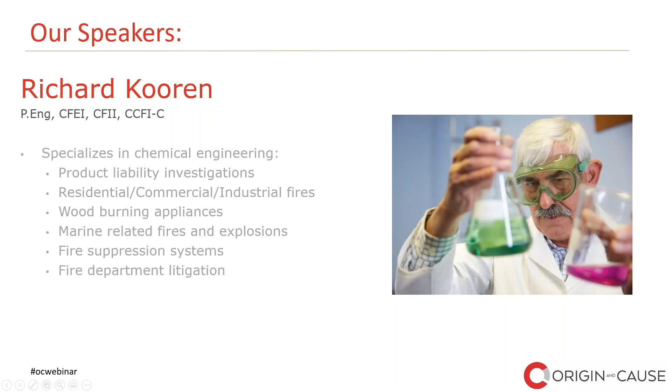Welcome, everyone. So, in any forensic investigation, you must first zero in on the origin of the incident. And within the place of origin, you will find the cause. A lot of people use the term origin and cause and cause and origin interchangeably. But to be correct, and I'm going to correct that today because it's technically incorrect, you determine the origin and then the cause of the fire.

In this webinar, we'll go through the investigative process of a forensic engineer specific to marine fires and explosions. And it'll become clear as to why there's no such thing as finding the cause and then the origin. It's origin, then cause. So first, finding the origin. How do you determine where the fire originated? Even in a structural fire, no different. You work from the least damage to the greatest damage.

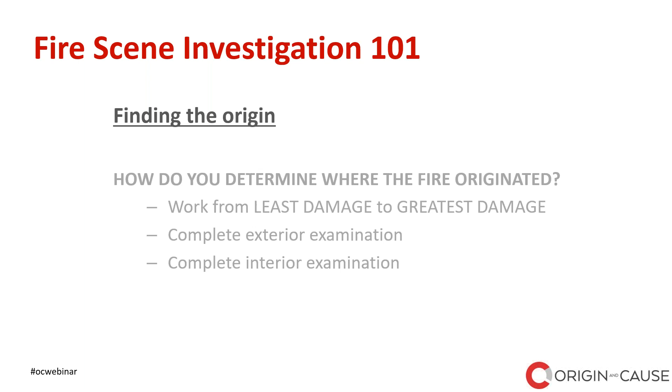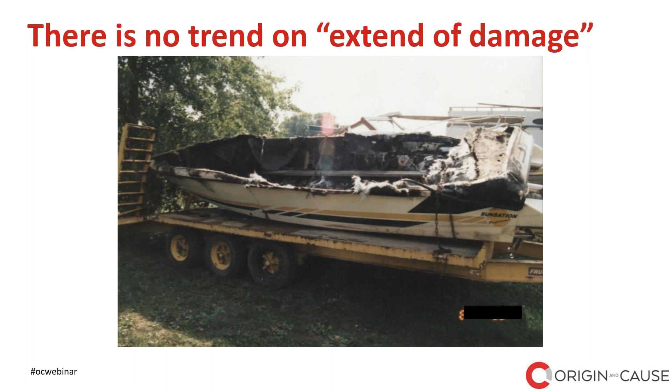And there's an example of a total loss. That's all that was left of the boat. So, information to consider in all marine fire investigations. One, time and place of the boat fire. Is the boat at a marina or is the boat in an isolated area? Time of day: is it in the middle of the night or middle of the day? Beginning or end of boating season? These are questions to think about when you're getting a loss.

Physical evidence, what we'll be looking at in the photographs as we go through this. We're looking at char patterns. Now, most boats are not wood anymore, but you still get them, and there's still wood on boats. So we're looking at char patterns, no different from a house or a building fire. Fiberglass delamination: with fiberglass, it's the epoxy resin that burns, not the fiberglass mat. So we're looking at how many layers of fiberglass have delaminated. It gives you an indication of how long the fire has burned.

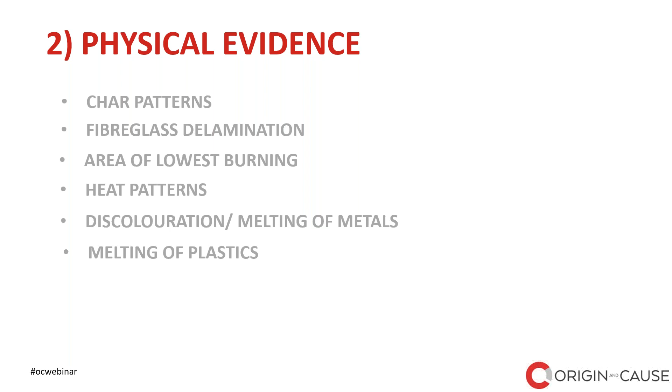Again, no different from a structural fire, the area of lowest burning. We're looking at heat patterns, again no different from a structure fire. We're looking at discoloration and melting of metals and melting of plastics. These are all indicators of proximity to the fire and direction of fire.

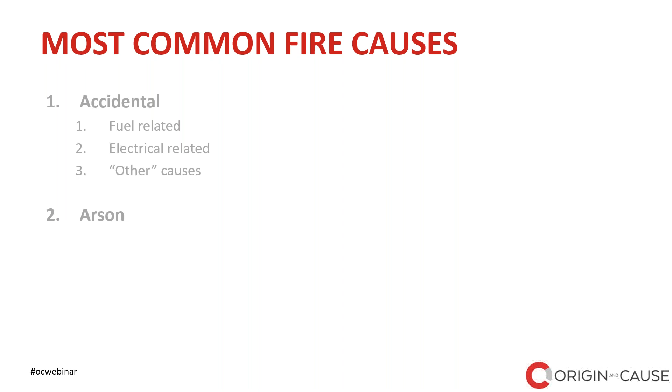Most common causes of fires. Here's the basic two categories. We have accidental, and under accidental, we have fuel related. Number two is electrical related, or three is other causes. And of course, then non-accidental: arson.

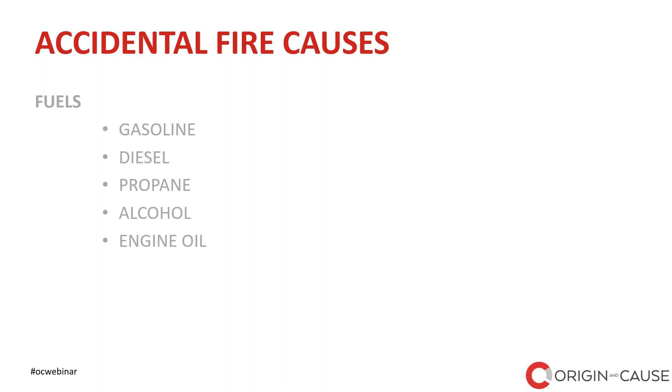Under accidental causes, fuels, you can have a varying degree. Most boats are gasoline, but some boats do have diesel engines. And on a lot of bigger boats now, it is not uncommon to find propane. This is not fueling the engine, but this is for the toys: the propane barbecues that are sitting on the boat or hanging from the aft rail. Older boats used to have alcohol cooking stoves. That's more or less gone by the wayside, but some of the older boats still have them. And then you can have an engine oil fire.

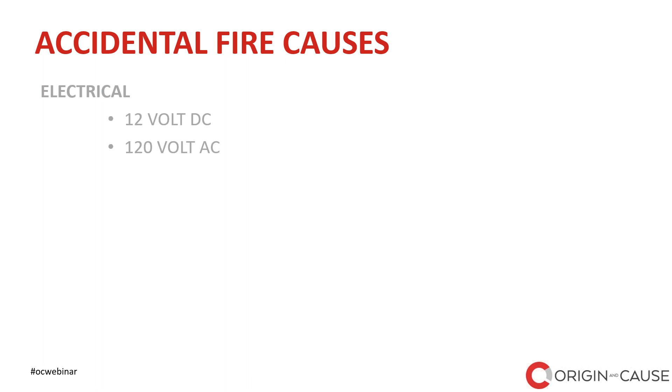Under electrical, you typically have one of two electrical sources. You have 12-volt DC, which is the onboard electrical batteries. And as most boats have shore power, you have 120-volt AC, but you can also have a generator on board the boat, which will produce the 120-volt current as well.

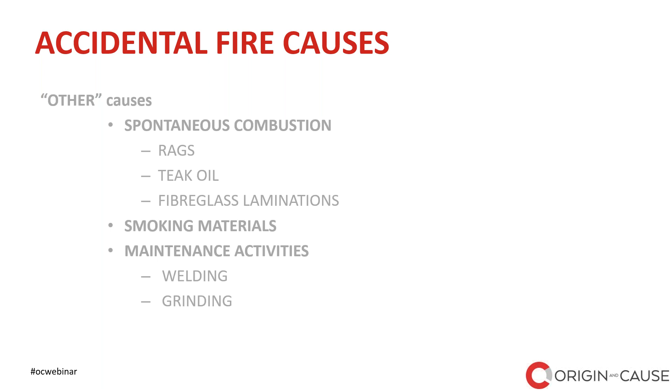Under other causes, you can have spontaneous combustion of rags soaked with teak oil, fiberglass laminations. It's a chemical process. It generates heat, and if not done properly, can cause a fire. Obviously, you could still have smoking materials. And on boats, there are some other maintenance activities such as welding, grinding, or even working on the engines for various reasons.

So here's our first accidental cause. This is an electrical fire. This is a 30-foot express sailboat. In a nutshell, the owner of this boat lived on the boat, worked in downtown Toronto, departed the boat first thing in the morning, and sometime later was notified that his boat had caught fire. Now, as you can see from that photograph, there is not a lot of damage to the exterior of this boat. It pretty well self-extinguished, fortunately.

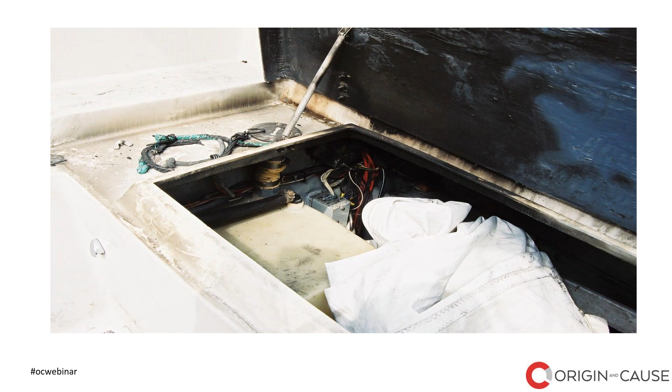But if we look at the hatch into the cabin, you can see there's some heat deformation, there's smoke damage, all in the area of the hatch cover. No evidence of fire on the aft deck area. It's pretty clean. Now we're looking at, on the aft deck area, what's commonly called a sail locker. And you can see on the underside of the hatch cover, there is quite a bit of smoke. So there's an indication that the fire has migrated into this area at least.

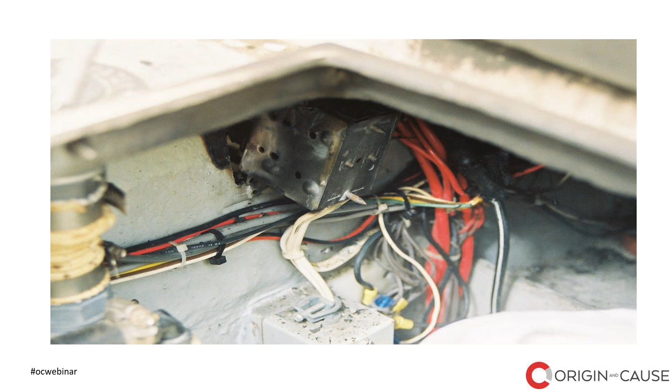Now we look a little closer into the hatch area, and you can see that metal box here in the middle of the screen, and that's a junction box. Now, we're going to raise this point a little further later, but is that appropriate for a boat? And we will see why.

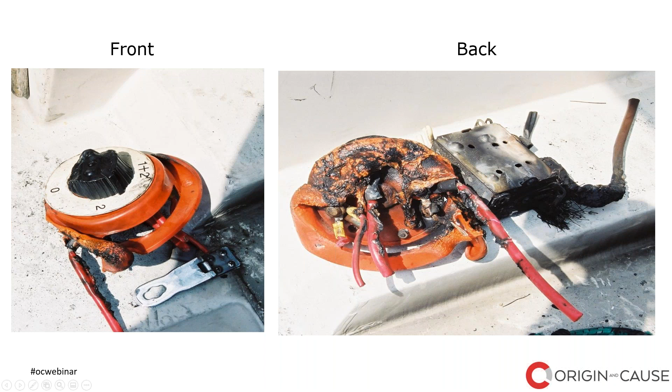Now you can see this battery switch has sustained some fire damage, but the greater damage is to the right of it. Now we're looking at the battery switch here in this photograph. That's the top of it, and you can again see there's major exposure fire damage to it. There's the back side. Again, exposure fire damage, no evidence of any internal failure. And there's our junction box. Now, what is that junction box being used for? Well, closer look, and we see it is a receptacle box.

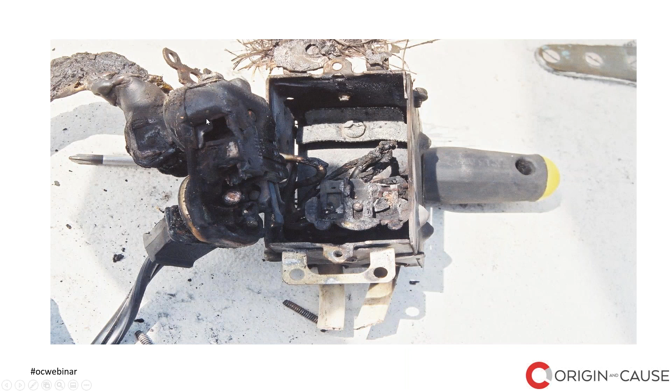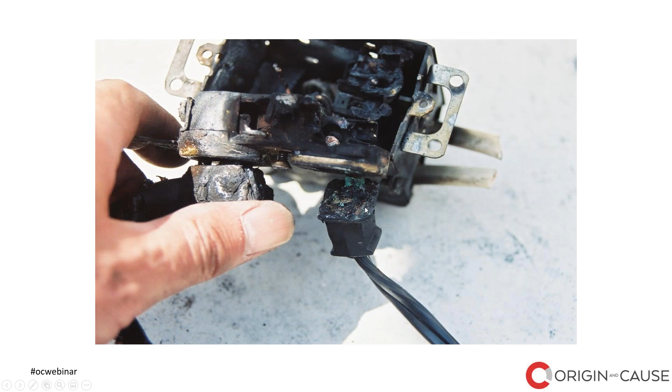Now we've opened it up, and you can see the upper half is not badly fire damaged. The lower half, the Bakelite material, has disintegrated, and you can see a nice big glob of copper there and a glob of copper down here. You can see this is the center of the electrical activity in this case. Now, when we look a little closer at this plug, the bottom plug, you can see that one of the prongs is actually melted right off. The other half is still there. But notice the green oxide on it.

Now, again, because this junction box is designed for a house, not a boat, it's not watertight, it's not moisture resistant, and boats, being boats, are not 100% watertight on the exterior. So moisture has infiltrated into this receptacle box over time, built up corrosion, and that corrosion has now become conductive, and we've had an electrical failure resulting in this fire.

So take home points from this little example. Boat owners commonly make their own modifications to their boats. They don't like having people sometimes do the work for them when they can do it themselves. It's cheap. They don't always use the proper materials. As an adjuster, it's crucial to preserve the evidence at the scene.

And as an adjuster, you need to ask these questions. Has the owner had any repairs or modifications done to the boat lately? And if so, who did the work? And regardless of who did the work, obtain detailed statements to protect yourself from liability. Now, with any lawyers present in this webinar, you need to make sure some of these points are covered off too, if we're going to litigation.

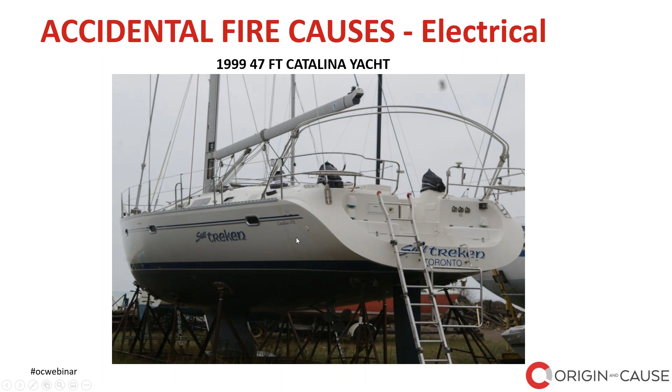So now we're looking at a second example of an electrical fire. This is, again, not an extreme. You can see this boat, a very, very large 47-foot Catalina yacht. It's an older one, 1999. This boat had actually sailed across the Atlantic. It's that capable. History on this boat, the gentleman had it winterized. It was onshore. Now, in the next photograph, you can see the boat looking out toward the lake.

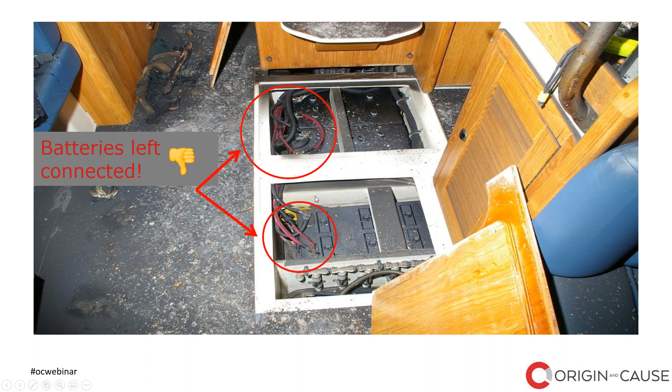So this boat had live 12-volt power all the time, even when it's on dry land in the middle of the winter. Why is a good question. So is it a good idea? There's no need. You're not running bilge pumps because it's keeping the bilge empty of water. There's absolutely no need for this boat to have electrical power.

Now, again, going back to an exterior shot of the boat, notice the mast is in place. Is this a great idea? This mast may not have been one that could easily be taken down in the wintertime. It sat on top of the roof cabin. It didn't go all the way down. So yes, it could, but it's a big mast.

But think about it, wintertime, strong winds, what is that mast going to do when subjected to extensive high winds? It's going to shake. And that vibration is going to be transferred through the boat. And those wires are going to be shaken around. If the boat has sailed across the Atlantic, it's also going to have been banged around. So the wires are actually rubbing together and have been rubbing together for quite some time. And finally, they shorted out and we had a fire.

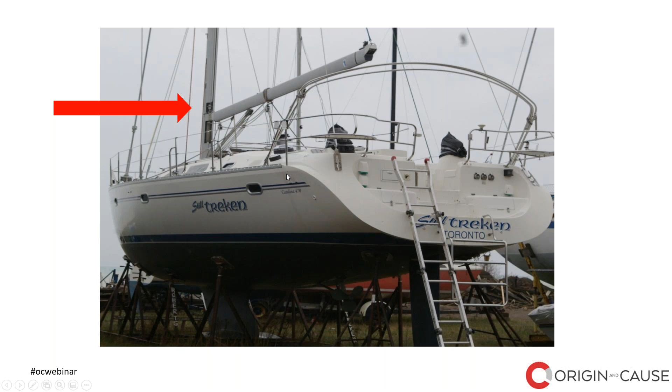So again, when boats are placed in winter storage, all electrical sources should be disconnected. There's no need to have an electrical source or live electrical on the boat. So questions you need to ask when you receive a fire for a boat in storage: Was the boat winterized? If so, who did the work? Many boat owners will winterize the boat themselves, because it costs money to have somebody do it.

And again, if they did do the work themselves, have them explain what they did for the winterizing. Were the batteries disconnected? And in this case, could the mast have been taken down? It's something that may have been practical, it may not have been practical.

Okay, moving on. We have another accidental cause, and this time it's a fuel explosion. It's a 1986 25-foot Doral Citation. A very brief background. The current owners had purchased this boat quite recently. No problems with it that they knew of. They were refueling the boat, and after refueling, they went to start the engines. Now, whether they ran the bilge fans long enough to evacuate any gasoline vapors, which they're supposed to, it's not known. And anyway, the boat had an explosion.

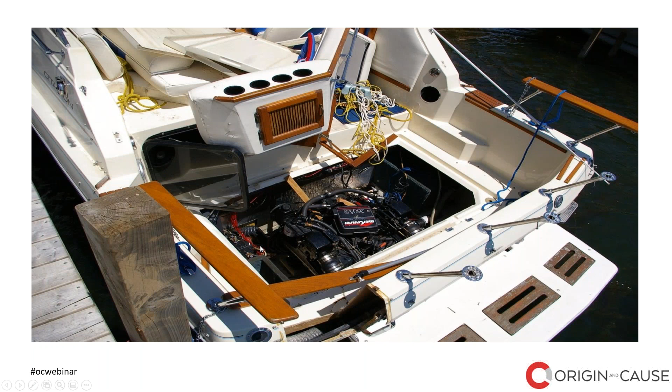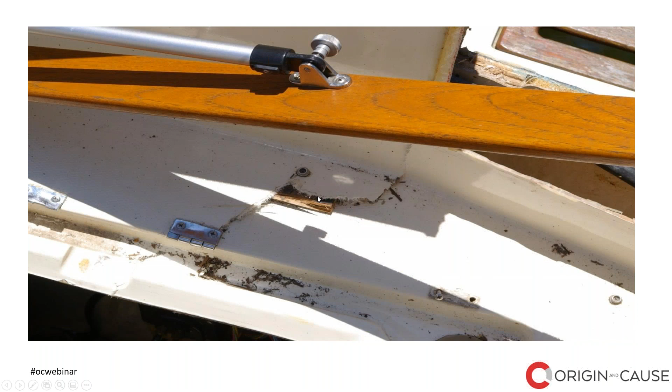So now we're looking at the aft, or the stern of the boat. There's the engine compartment, and you can see there's no evidence of damage below, but look at all the other items. Look at the railings that have been broken off and separated. This little console here has been displaced, because obviously it would not normally be sitting blocking the porthole window. So again, giving an indication of the push that took place. And again, we've seen the railing, it is actually lifted upwards and it's cracked and torn the deck.

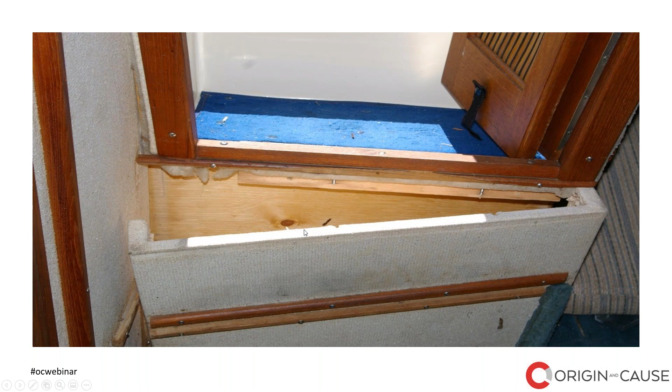This is looking inside the cabin, and you can see that the explosion has actually blown into the cabin and displaced the steps. And you can see a lot of displacement, delamination of plastic due to the flexing of the hull. Again, looking at the engine compartment, there is a bit of heat damage here, and you'll see there is a bilge fan duct there that's spiral wire covered in plastic, and it is melted off. But no obvious sign of fire within this area. But the ignition source did occur down here.

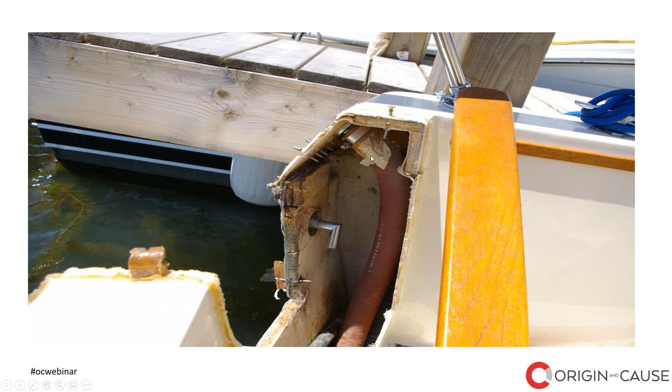So again, looking at this area here, this was actually a little door that allowed you to step into the aft deck area from the swim platform. So we're going to look closer at it. Now, again, this would normally be all concealed. So the red line here is your fuel line. That's where you're filling the fuel tank up at the pump. And you notice there's masking tape around the hose. And a closer look, you'll see there's a clamp on the fitting. So that fuel line is firmly secured. Why this masking tape was there, we think it was used as a seal, but the current owners didn't do this.

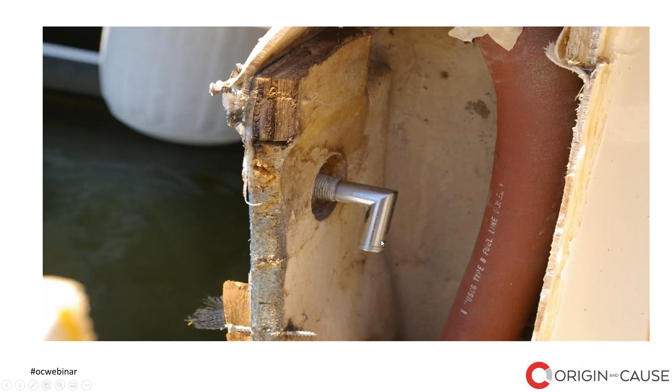Now, we're looking below that area, and again, there's your fuel line. This fitting here is the vent line for the fuel tank. So when you're filling up your fuel tank, gasoline vapors and air are being pushed out of the fuel tank. They're being displaced. They've got to go somewhere. So rather than let them go into the engine compartment, there is a line that directs those vapors and purges it on the exterior of the boat. But the question here is, where is the line?

Well, there it is. A black rubber hose, no hose clamp, and masking tape holding it in place. So in this instance, what we've had is that the clamp or the vent line has come off at some time. And of course, when the boat is now being refueled, those vapors, instead of being vented to the exterior of the boat, are accumulating or venting right into the engine compartment. So again, lesson to be learned.

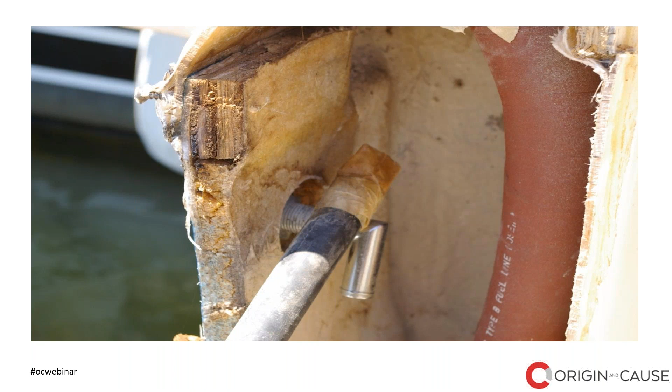So take-home points. When purchasing a used boat, it has risks, and so does insuring them. And questions an adjuster needs to ask: where and when did you buy the boat? Obviously, was it previously owned? If it was previously owned, did you have a marine surveyor examine the boat? A marine surveyor is like a home inspector. I think they do a little more thorough job, but they look at the hull, they look at everything, and they give the buyer an assessment of the condition of the boat.

Now, again, whether a marine surveyor would have seen this, because it would have required removing some things, but I know that marine surveyors do a pretty intensive job. And again, was there any recent or past service work done that the insureds know of? And again, if so, who did the work? Important points to know.

So moving on to another fire. This was again fuel related, but it ties into workmanship. Now, this is a 2001 Carver 350. Brief history on the boat.

The owners were sailing the boat across Georgian Bay, from Killarney, Ontario to Manitoulin Island. And en route, they lost power in one of the engines and limped to Manitoulin Island with one engine. They tried to get a marine mechanic, pulled into a service area. They didn't have room to hold the boat, so the boat was then taken to a public marina owned by the municipality and docked there, and the mechanics came to the boat.

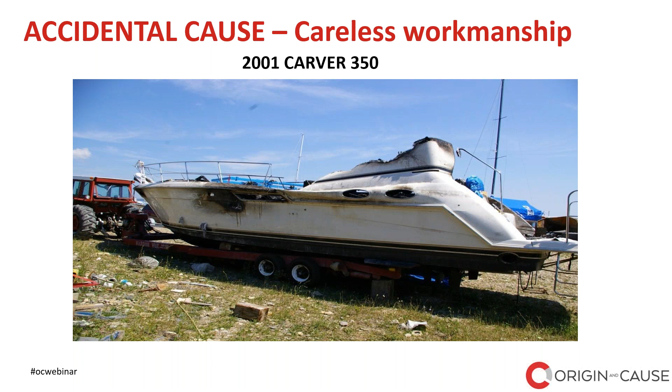The municipality had kept water pumps going on it because of course the fire department are dumping water onto this boat to put out the fire, and it's going to sink. So they had kept pumps on it, but unfortunately they had to stop, and the boat did sink. We then brought in commercial divers and airbags and pumps, and it took a good part of a day to get this boat back to a floating condition.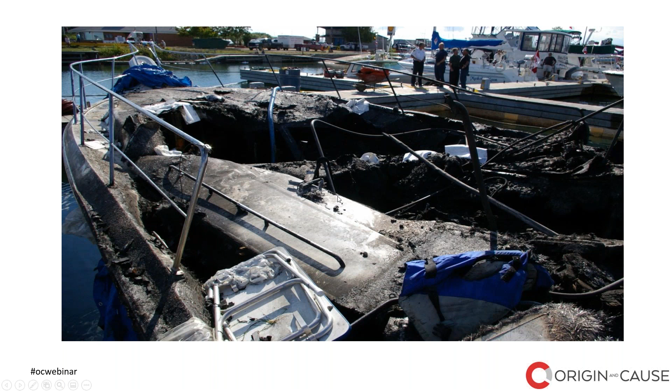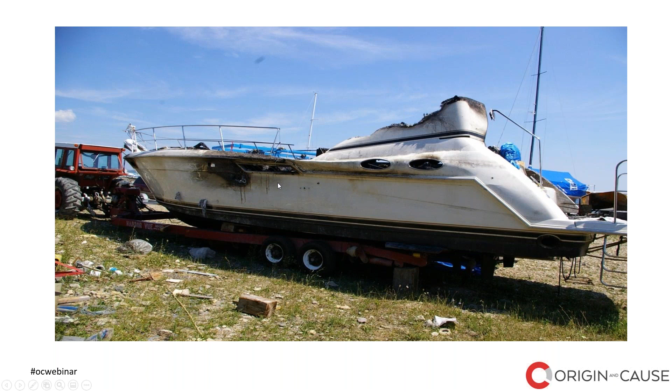So now the boat is on dry land, and we can safely begin our examination. Again, exterior shots of the hull. Unfortunately, because there was a bin placed on the other side, we couldn't get a shot of the other side of the hull, but we did have one when it was still afloat. So now we're looking at the aft, or the stern of the boat, and this is where the engines are located. And this boat happened to have an aft cabin. So the main salon or main bedroom was actually located above this area of the boat.

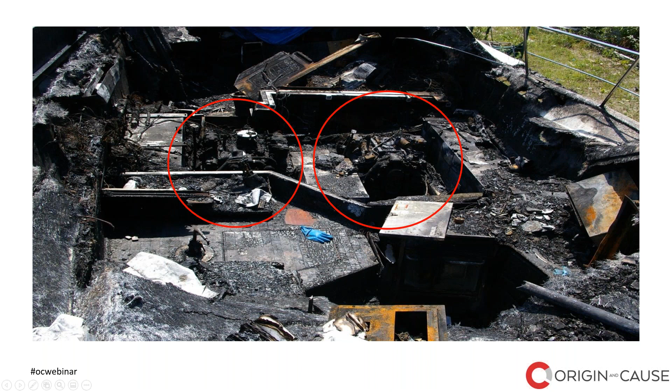Now, closer view, the two engines, and you can see the port engine here and the starboard engine here. And you can see there's quite a bit of difference in damage to the two engines. There's a closer view again. Here's the starboard engine. The fuel tank is relatively undamaged. Carburetor and filter are still in place. Fuel lines, coolant lines and everything are not too bad.

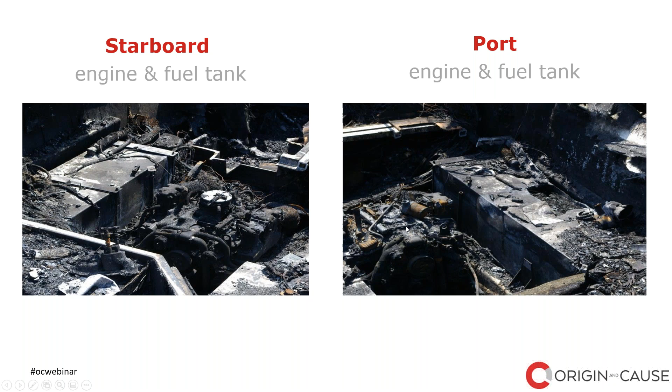We look at the port engine. You can see that the port engine fuel tank is partially melted. Extensive damage to the top of the engine. The carburetor is completely gone. A closer view. So number one is the carburetor, what's left of it. Number two is the fuel rail. This is a fuel injected engine, like a car. And the fuel rail runs on both sides. They're interconnected, and pressurized gasoline is distributed in the fuel rail and then injected into the cylinders when required.

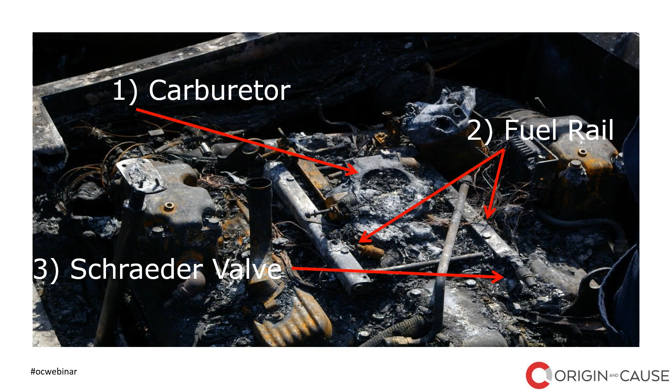Now, on these fuel rails, there is what's called a Schrader valve. And the Schrader valve is like the fill valve on your bicycle tire. It's to bleed air out when the system is being originally set up or work is being done on it. So now we're looking again. Here's the starboard engine with the Schrader valve as it's supposed to be. Here's the port engine, and you can see there's an object on the Schrader valve. And the question is, what is it?

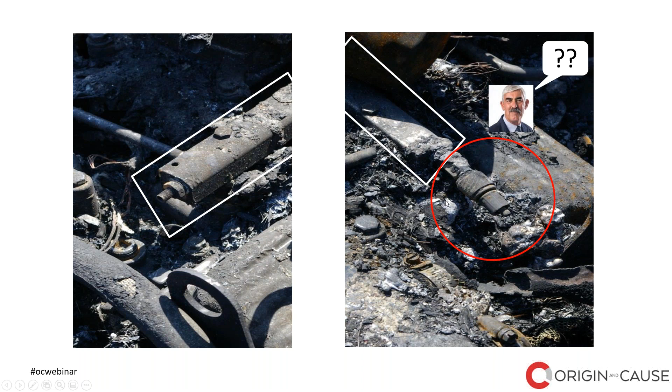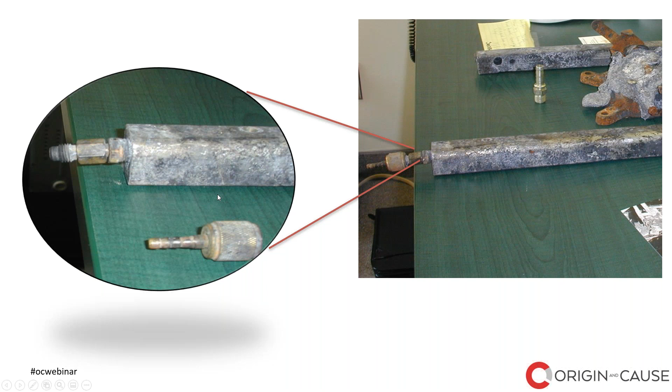So closer look. Here are the parts still attached to the fuel rail. And you can see this is still all part of the components. We haven't taken it all apart. Turns out what we had connected to the Schrader valve was this. This is a pressure gauge. The mechanics that were working on the boat at the time had hooked up this pressure gauge to the fuel rail to basically do their diagnosis and figure out what was causing this engine to run improperly.

The question or the problem was, one mechanic was down in the engine compartment, the other mechanic was up at the helm running the throttles on the engine. And then the mechanic in the engine compartment left. And this was just laying on top of the engine. And you can see this large long plastic tubing is for bleeding the air off the line and seeing that gasoline is actually coming out.

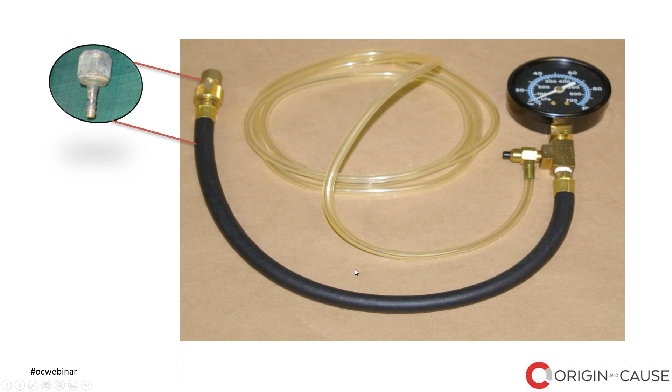And it's our opinion that this component fell off the engine, got tangled up in the pulleys while the engine was running, and of course ripped off. And this is the part, this hose ripped off of the barb. And now we're dumping high pressure gasoline into the engine compartment, which was ignited and resulted in this, basically a flash fire. So faulty workmanship, improper installations, improper choice of materials used in the installations, or improper choice of equipment used in repairs happen quite often.

Perhaps there's no such thing as a certified marine mechanic. There are no regulatory bodies providing formal training programs or licensing for this vocation. It is simply a mechanic specializing in boats based on their exposure and experience to them. Therefore, the quality of workmanship and the repairs done to boats is dependent on the quality of informal training and the experience the mechanic working on the boat has. It's the luck of the draw, basically. So make sure you get as much information about the service work done and the mechanics when receiving a claim.

Questions you need to ask: what is the name of the company that did the repairs? The mechanic's information. What components were repaired, replaced, and from where? And were components suitable for a marine application? Again, it's not uncommon. An alternator on a marine engine does the same thing as an alternator on a car, but marine alternators are designed for wet and moist environments, a big difference.

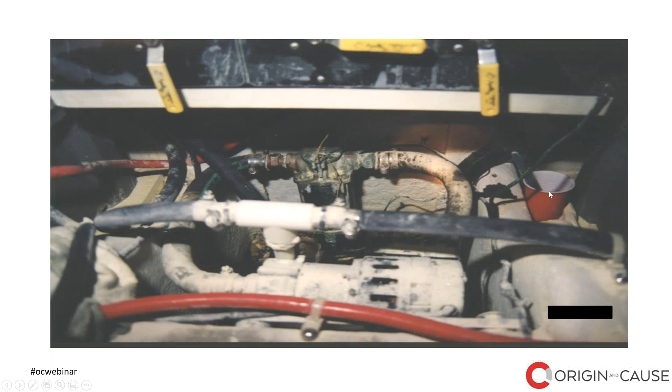So we're down in the boat, in the engine compartment. You can see that work is being done disconnecting the batteries. There's one of the battery cables. There's where it would have been attached. So work is being done by the owner on the batteries. Over here, we have a little red Dixie cup with something in it. You'll see a better picture of it in a minute. But as I said, work is being done on the batteries.

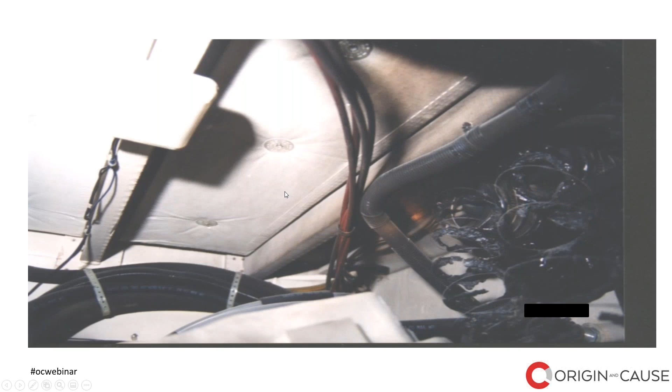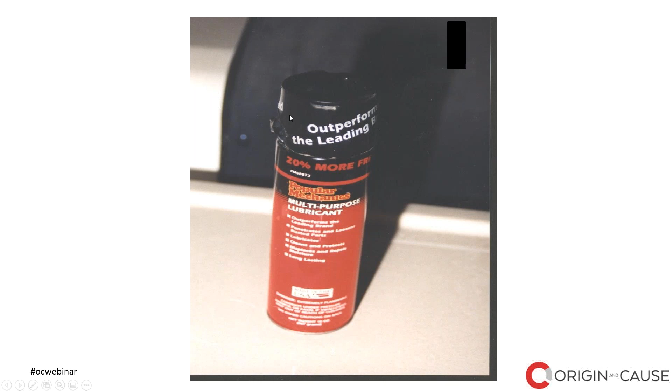Again, a view of the engine compartment upper area, not a lot of fire damage here, but you can see the bilge fan vents, the plastic is melted off the hoses. Just showing you there was heat there, it just wasn't enough to cause ignition and burning. So this was recovered from the scene. What it was being used for at the time, we don't know, but it is the source of this whole incident. You can see the can doesn't appear to be badly damaged. When we look at the can itself, you can see the cover. He wasn't actually using it, but the cover is melted.

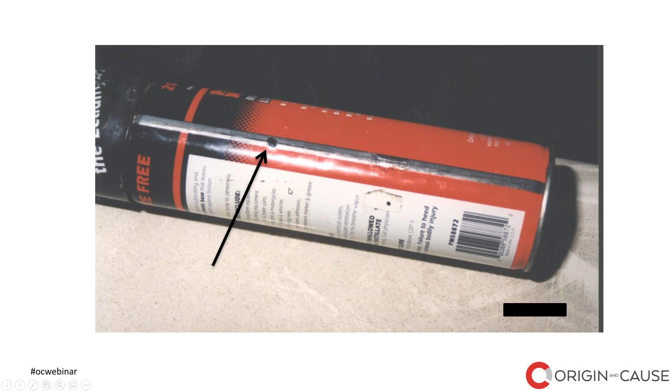This product was a WD-40 spinoff sold by a large department store. They had it manufactured for them. So this little mark here is actually a hole that is burned through the sidewall of the can. Now you notice this label is painted on, or it's a plastic, but it doesn't cover over the seam. So this is the only exposed metal on the whole exterior of the can other than the base. So there's one mark. There's a closer view, and you can see there's actually a hole right into the can.

There's another mark on the base, and they line up. So again, this is an aerosol can. This product used butane as a propellant, which is not uncommon. And of course, butane is a flammable gas. So if you burn a hole through the sidewall of the can, the butane gas is going to come out very, very quickly. And if there's an ignition source, it's going to do it.

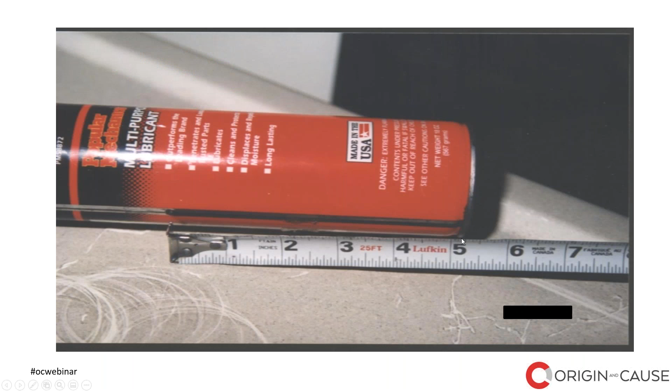So how did we create these marks? Well, we measured the distance from the one mark to the base of the can, and it's 5¼ inches. When we measure the distance between the terminal posts on the battery, 5¼ inches. So the consensus was that the can must have fallen down, and just by luck of the draw, I mean, you've got almost 360 degrees of protected surface, but the 15-degree area or narrow strip of unprotected metal made contact with those batteries.

It's now an electrical short. It burned a hole in the can, and as it rolled off, the parting spark ignited the butane gas and resulted in the incident. So humans make mistakes. Some have more dire consequences than others, in this case, fatal. The nature of boats having confined areas makes it difficult sometimes to do the simplest of tasks. Therefore, human error claims such as these are not uncommon.

Questions you as an adjuster or a lawyer need to ask: focus on the insured, their actions, their background, their experience. A lot of times we run into claims where the insured is a contractor or mechanic and simply wants to do the work themselves. Some people feel their technical background is transferable to a marine environment. I think if you have that in a statement, it helps to bring context to the story. If they purchased any products, find out from where, and if by any chance they have receipts, get them, because there may be a product liability claim.

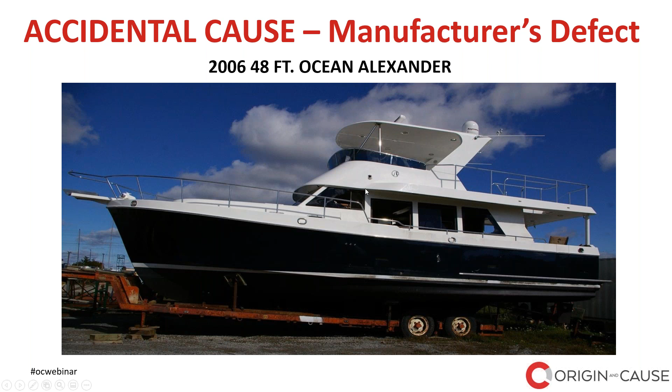The boat was being sailed across Lake Ontario by the sales agent and his captain. After work was done in the United States on it, a fire suppression system was installed. The hull was repainted. There were some other repairs done, and they landed in Toronto at the In-Water Boat Show. It was going to be on display, and they discovered a fire. So again, you can see not a lot of obvious exterior damage. Look inside the cabin. There is evidence of some damage in here.

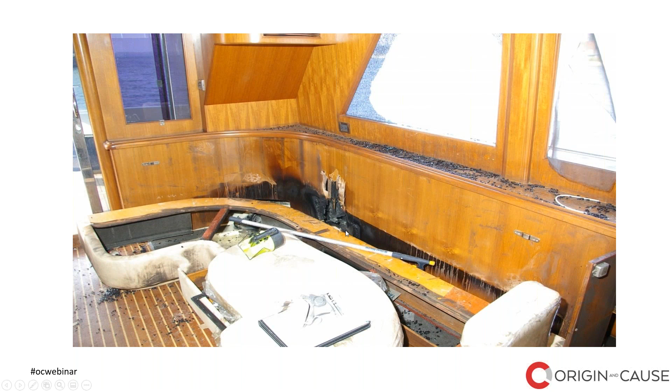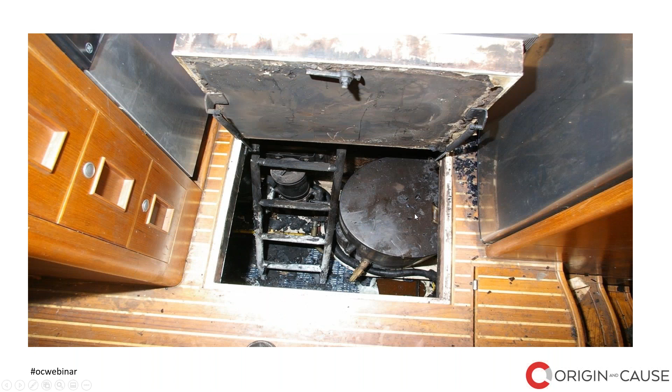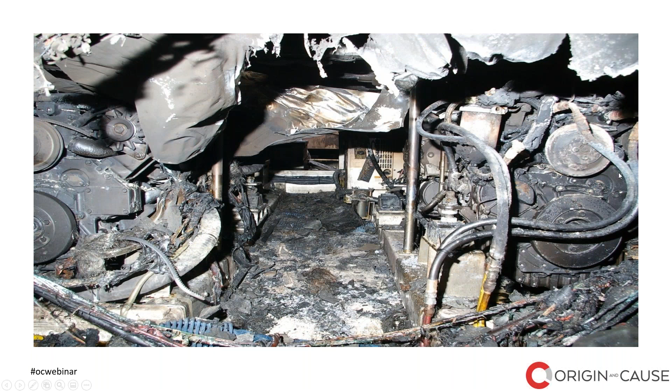Definitely the fire has migrated up from the bench area, from the area below, into the cabin area. So obviously the fire is down in the engines. Now we're looking down through a hatch into the engine compartment. It's one of two access points into the engine compartment. Looking inside the engine compartment, you can see the two large diesel engines. So these are diesel. The engine on the right side of the photograph has obviously sustained more fire damage than the left engine.

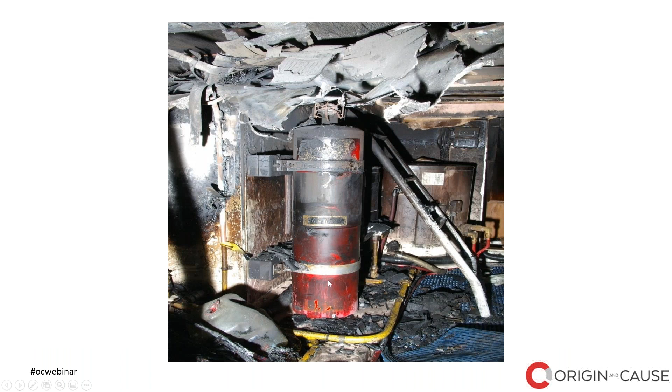Looking a little closer, you can see a lot of fire damage in this area. This was also where the battery switches were located. Also, and you'll see it in the next photograph, here is the fire suppression system that was installed at a marina in the United States before the boat was brought back. And again, you can see there's quite a bit of fire damage in here. This system should have automatically operated, put out the fire before it reached this stage.

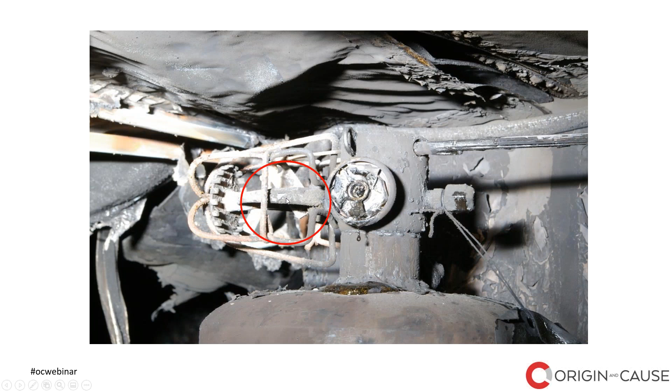We're looking at the fire extinguisher itself. Now, the circle here is where the manual cable, which is this part here, hooks up to a glass bulb. And if you pull a handle, you can break the bulb. But automatically, that bulb will break. It's filled with liquid, and the bulb will break when it's exposed to fire, causing the fire suppression system to discharge automatically. Now, again, you can see the gauge is destroyed, but we weighed it after the fact and we confirmed that the cylinder was empty at some point in time. But whether it discharged properly or not is another question.

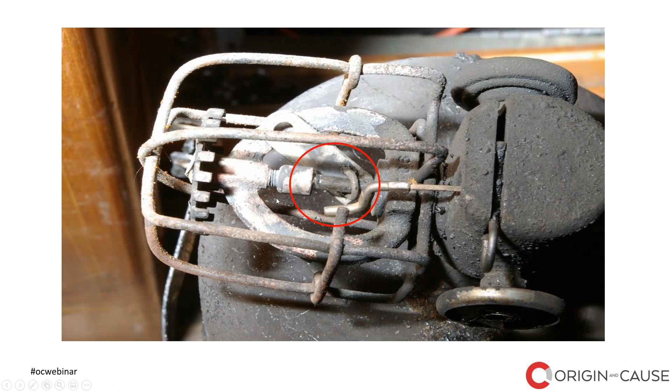So here's a view of the top. And again, there's our glass bulb, and you can see it's not broken at all. It appears to be completely intact. And this little device here was actually looped into this tab. So aside from preserving the whole boat, this cylinder was removed to be preserved as evidence.

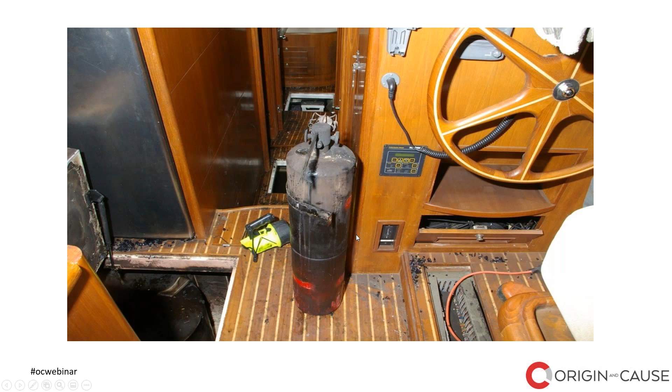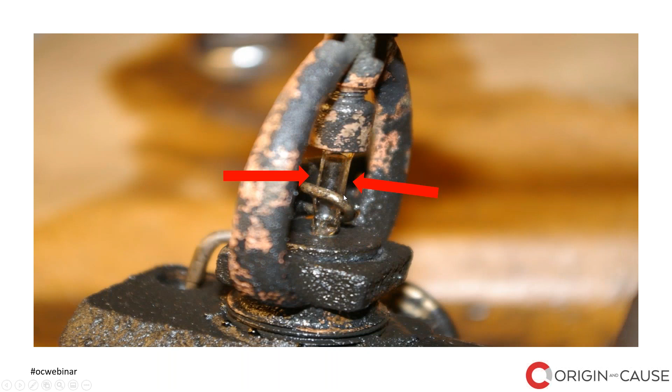When we looked at this with the fire suppression system manufacturer more closely, again, it doesn't appear that the bulb has any issues. When we actually touched it, the glass was actually cracked, and probably had been cracked when it was installed, and the liquid inside leaked out, or as the heat built up, it seeped out, but it didn't break the bulb, and thus the system did not fire, because this has to open up a valve right here. With that glass in place, it will not open the valve.

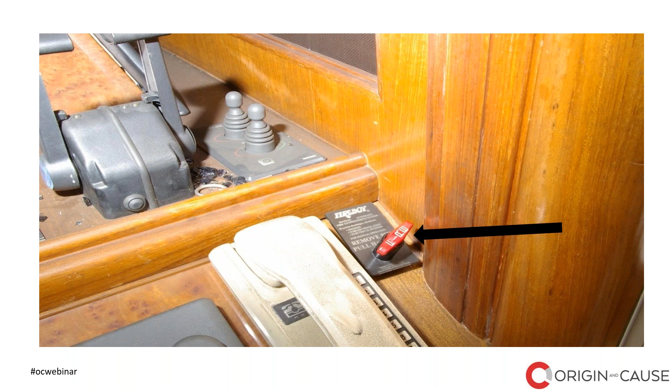What I didn't mention was when they discovered the fire, the captain on the boat grabbed the manual firing mechanism, which is right in the helm in the cabin, and pulled it. And again, remember this little tab and this wire. And when he pulled it, this is what he got. That's not supposed to be what happened.

Think of this as your hood release cable or something similar, the secondary cable. Anyway, this is not what is supposed to happen. That had no effect, because all it's doing is pulling the whole cable. The actual metal wiring inside of it didn't move, and there was quite a bit of cable inside the engine compartment, so it didn't do anything.

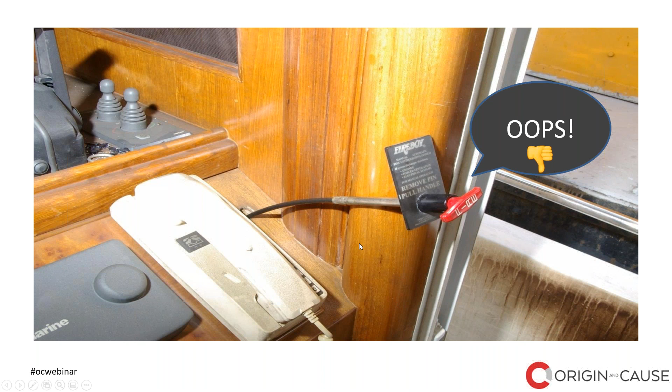So now we can see that when they installed this, the marina drilled a hole to fit and just slide the whole thing in, instead of drilling a hole no bigger than that threaded bushing. And so when everything is in place and they attach the nut and bolt and washer, it is locked in place. And so when you pull on the handle, the wire will move, not the whole assembly. Again, another view.

So the cause of this fire we didn't discuss, but we believe it was an electrical fire, and not all foreign manufactured boats are built to the same North American standards. Through research, because of the organization I belong to, IAMI, I found out there were several other boats in the United States by the same manufacturer, and they all had electrical fires in different locations, and it was all determined basically that the wiring was not done properly, and there were shortcuts made, and so that was the center of the issue.

The interesting thing was, in the lawsuit that happened, the manufacturer was sued, and so was the marina in the United States. The marina in the States was invited to attend along with the boat manufacturer, the salesman, and Fireboy, the fire suppression company. All but the marina participated in joint examinations. When it came to mediation, the lawyer showed up from the marina with a report indicating how this fire was caused when they hadn't even looked at it. And when it was pointed out how wrong they were, they ended up being nailed with 75% of the costs of the boat loss. So questions you need to ask: obtain all purchasing documentation, very valuable. Where was it purchased? Was any work done after delivery, and who did the work?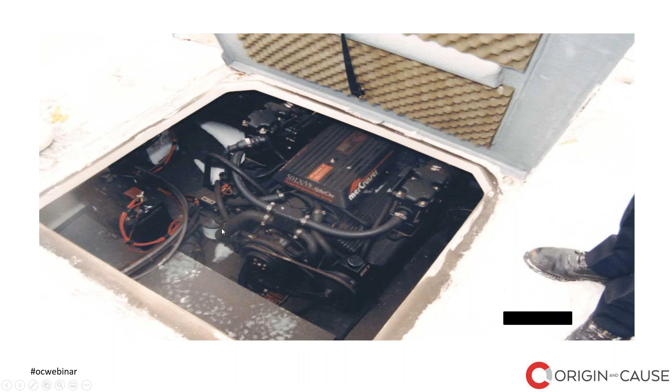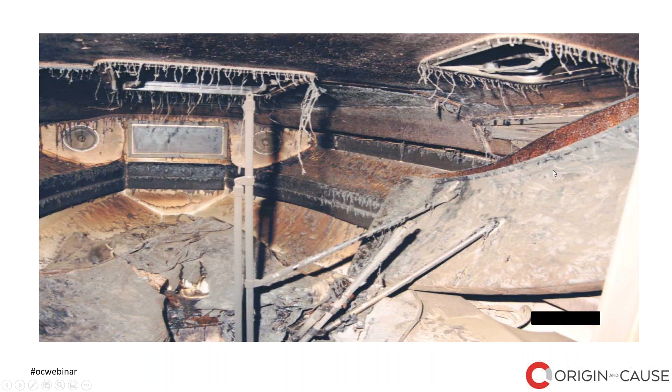Again, Sea Ray, looking at the fire, you can see the fire is coming out from the cabin area. You can see the engine compartment is intact. Batteries are connected, again, for no reason, but there's no fire in the engine compartment. So now we're looking into the cabin, obvious fire, a lot of heat. Again, this fire self-extinguished, but you can see the effects of the heat.

It's delaminated plastic up high, melted plastic, but you can see the seat cushions here, the bed cushions are all burnt from the bottom, and this is the seat of the fire. Very obvious where the fire originated. And again, this fire self-extinguished.

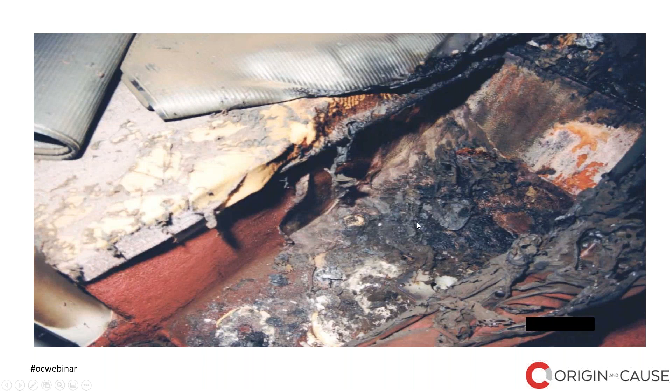Anyways, important to know, this is straightforward arson, but I want to emphasize the importance of something I brought up at the beginning of the webinar. It's important to know when and where the loss took place, the time of year, and the activities of the insured prior to the fire.

You need to consider if the boat was found in an isolated area, what time of day the loss took place, whether it happened in the beginning or the end of the boating season. A lot of arsonists are trying to get rid of their boat at the beginning of the season to buy a new one, and for whatever reason it can't sell. We also see them at the end of the season in cases where extensive amounts of repairs are now required in order to make the boat seaworthy again. So they decide, instead of trying to repair the boat or sell it, they'll have the insurance company buy it.

So boat owners commonly make their own modifications. They don't always use the proper materials. It's crucial to preserve the scene and evidence. Again, this is a summary of everything we have. When boats are placed in winter storage, always have the electrical sources disconnected. There's no logical reason to keep the batteries connected on the boats when they're in storage. High risk, no reward. And purchasing a used boat can have risks.

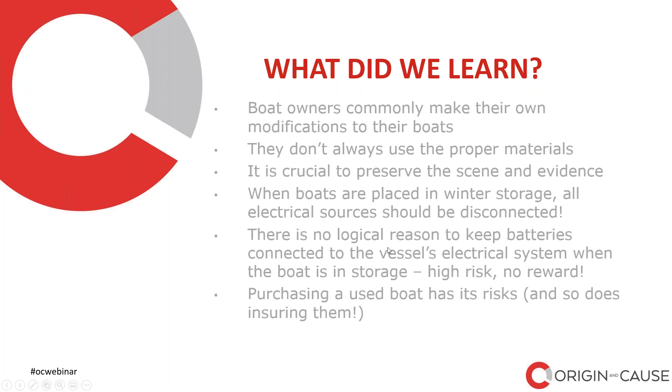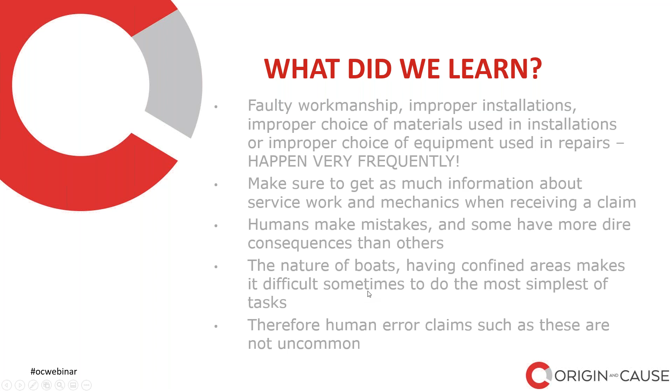Faulty workmanship, improper installation, improper choice of materials used in the installation, or improper choice of equipment used happens quite often. Make sure to get as much information about the service work and the mechanics when receiving a loss. Humans make mistakes, and some have dire consequences. Boats having confined areas, sometimes it is difficult to do the most simple tasks. Human error claims such as this are not uncommon. And not all manufactured boats are built to North American standards.